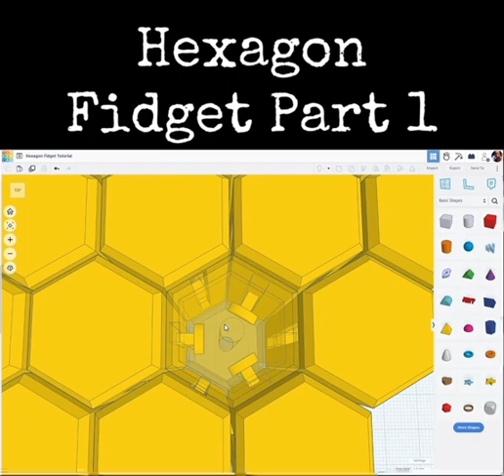Let's go ahead and change that back to solid. Now here's an example of what those look like individually. This is one that's been grouped together, ready to go. And this is what it looks like in all the component parts.

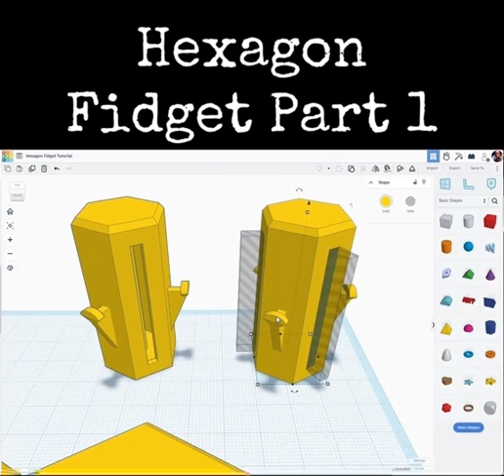There's going to be the hexagon in the middle that'll be hollow with a cylinder inside of it, and then there'll be 3 slots and 3 of these little ears that protrude out. So let's go ahead and begin.

Let's first grab all of this and move it up out of the way. We'll grab all of these and move them out of our way. Oh, grabbed too much. Let's bring this over here.

Okay, we're going to begin by bringing out a hexagon from over here. And let's change it to yellow. Makes it easier for us to see.

The first thing I'm going to do is scale this up a bit. Holding Alt and Shift so that everything is scaled equally, I'm going to click on a corner and change this dimension to 25.

I want to put a little bit of a bevel on here, so I'm going to use this slider in the dialog. That looks pretty good. Note too that if I simply start dragging this, the bevel's going to change.

We'll address making this a little bit taller in a moment. It also has a bevel at the bottom here that we're going to need to remove because I want it to print flat without that bevel.

So the next thing we're going to do is grab a box over here, a whole box, and we're going to slice off the bottom of this.

Zoom in here. I'm going to go ahead for now and change my snap grid to off to get the most amount of granularity here. And I'm just going to move this down until I'm just above where that bevel begins.

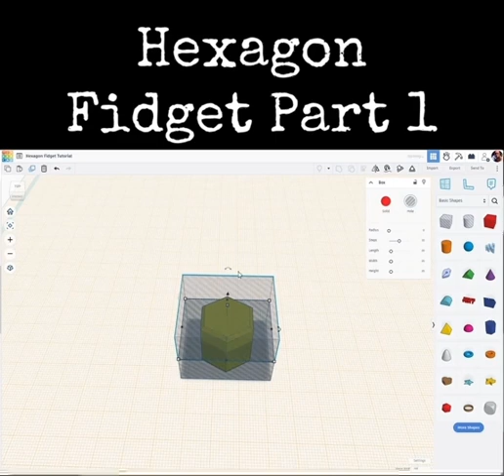While the whole box is selected, I'm going to hit duplicate, or I could hit Control D, D to drop it to that new work plane. W to do work plane again. Oop, put it back out on the default.

All right, now I'm going to grab all 3 of these objects. I'm going to duplicate them. Put my snap grid back to 1 millimeter here. Let's move that over to the right here.

Now on one of these, I'm going to delete the bottom whole box, and on the other, I'm going to delete the top one.

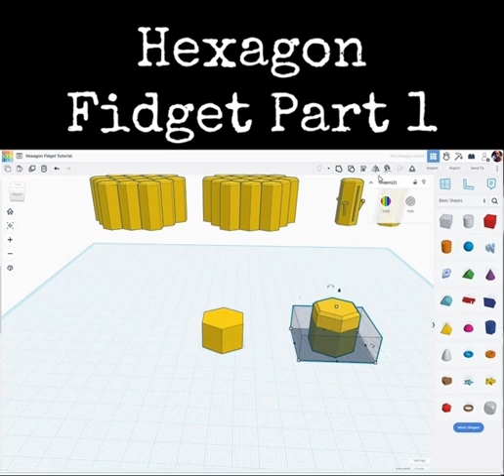I'm going to select these two, group those together, then these two, group those together, and voila. Now I'm going to realign these two, so I'll select this other half, click Align, and select the bottom half here to make it the focal point.

Everything's lined up in that direction. Now I can select this top one and use this movement handle to bring it up a ways. It doesn't matter how tall you want to make these, you can choose that however you want. The taller you make them, the more they'll slide past each other.

Now I'm going to select this bottom one, and I'm going to bring it up, increasing its height so that it intersects this top half. I'll select the two of those and group them together.

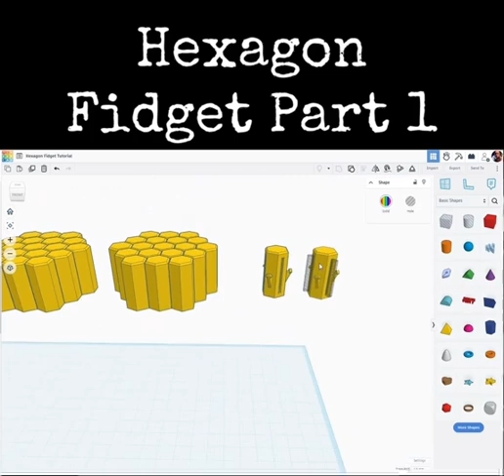Our next step now is to make this hollow. If we go back here and look at our example, if I make this transparent, it's hollow on the inside. There's a couple 3 millimeters at the bottom, a couple 3 millimeters at the top, and like 2 millimeters around each of the sides. So the way that we're going to do that, I'm going to zoom out here.

Let's get our hexagon back in focus here. We're going to select this, and I'm going to duplicate it. For just a moment, I'm going to bring this over to the side, and I'm going to turn it into a hole.

Now I want to make it so that all of the walls are 2 millimeters thick. So I'm going to hold Alt and Shift, select this side, and make this measurement 4 millimeters less, so 21. Now notice right now it's on the work plane.

I want to bring this up 2 millimeters. So I have my snap grid at 1, holding down Control, I'm going to use the up cursor key, 1, 2. There's 2 millimeters off the bottom. And it needs to be a little bit taller.

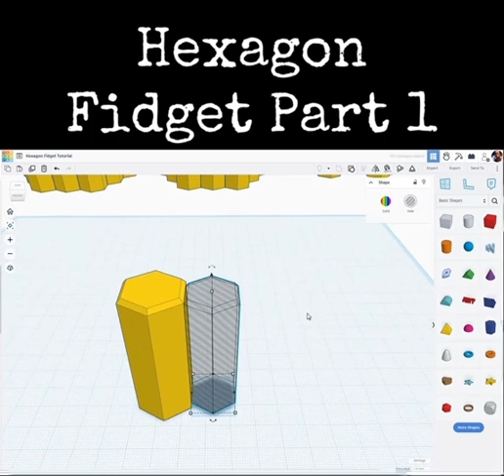Right about there. Okay, let's realign the two of these together. I've got them both selected, I'm going to click Align, and align them in the middle this way. They're aligned in the middle that way. While they're both selected, I'm going to group them together.

Now it's hard to see here, but it is now hollow on the inside. While it's selected, I'm going to hit T for transparent, and you can see that it's hollow. Now note, on our originals back here, there is a column in the middle of it that supports the top of it when we go to print this so that it doesn't droop. Remember, we can't have any supports in this.

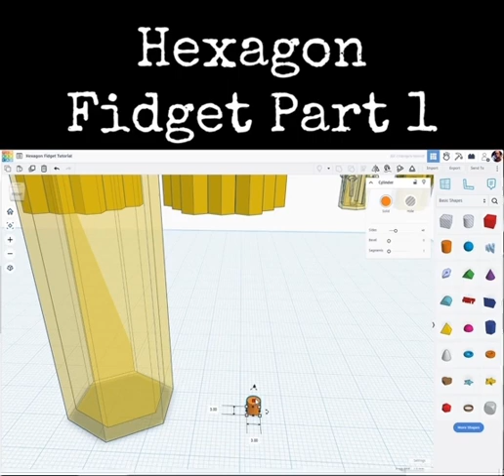So we're simply going to bring out a cylinder here. I'm going to hold Alt and Shift so that everything resizes uniformly. Let's make this, say, 3 millimeters. Let's drag it up and make it taller.

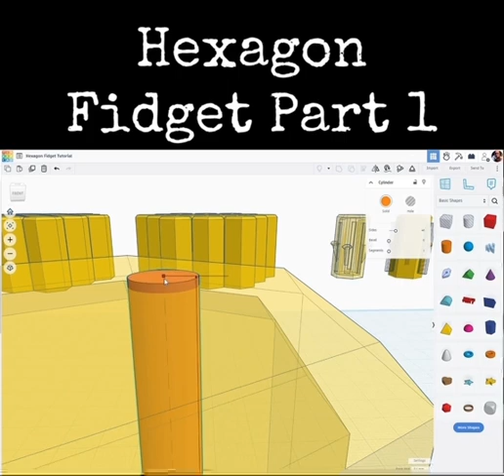For a moment, let's just bring it over here so we can see what we're doing. And I'm going to bring it up. Let's move our snap grid down to 0.1 here, and let's make sure that it's below the surface. We want to make sure that it's in the solid part, which it is.

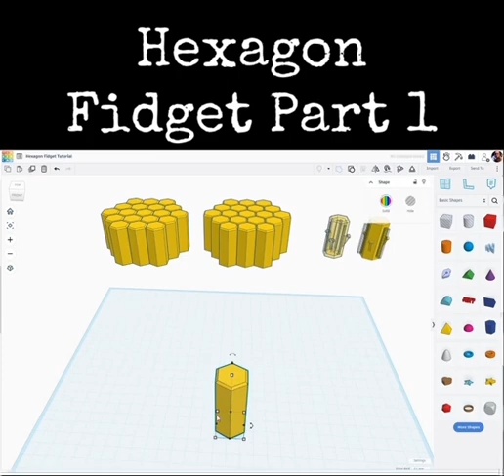Okay, I'm going to make that non-transparent again. Select both of those. Let's do a quick alignment, that direction. Have them both selected, group them together. Let's make it transparent, and there we've got that part of it.

So we're at about 9 minutes here. This is probably a good stopping point for part 1.